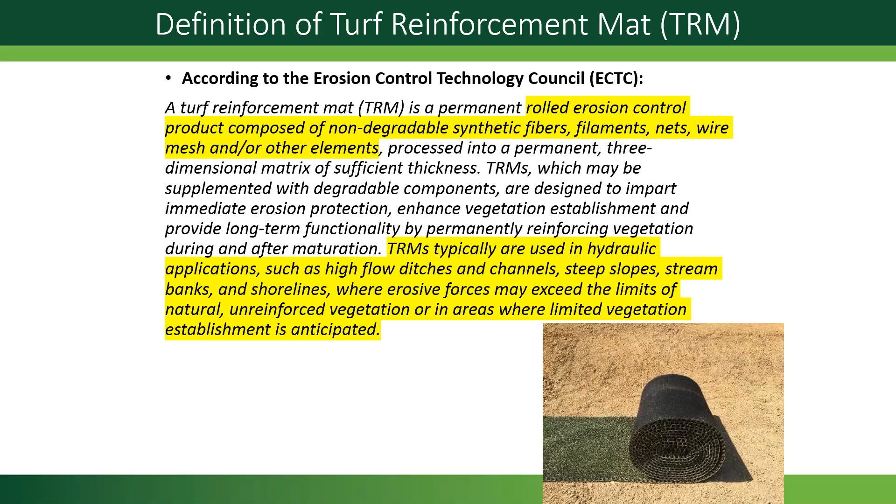Before we get into the products, I want to give you a little background on turf reinforcement mats, or as they're known in our industry, TRMs. The Erosion Control Technology Council has a published definition for TRMs: these are rolled erosion control products made from primarily non-degradable fibers or filaments. These products are typically used in high flow applications, very steep and high flow channels, steep slopes, stream banks, shorelines—basically in applications where the long-term erosive forces exceed the limits of natural unreinforced vegetation.

Now, the difference between a TRM and an erosion control blanket: an erosion control blanket is made from degradable materials. These products are used on a temporary basis to primarily control erosion and provide a mulching layer for vegetation establishment, but once the vegetation establishes, these products are expected to degrade. Erosion control blankets are typically manufactured from degradable natural fibers such as straw, coconut fiber, wood excelsior, and those materials are usually stitched into or between a photodegradable or natural fiber netting.

Permanent turf reinforcement mats, on the other hand, are made from non-degradable materials. These products are typically used not only to provide the initial erosion protection to get vegetation established, but they are meant to basically stick around long-term to reinforce the vegetation and increase the vegetation's erosion resistance.

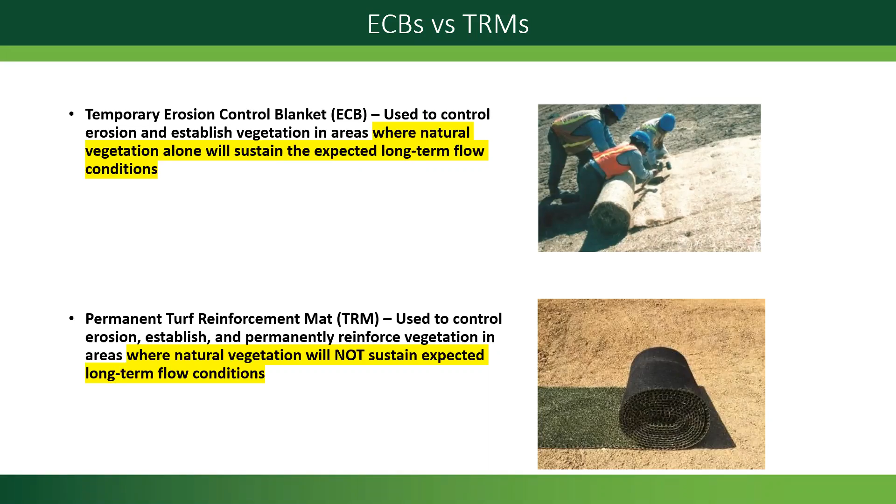TRM reinforced vegetation—these numbers are based on manufacturers' published values for the various products out there—typically range anywhere from 10 pounds per square foot up to 16 pounds per square foot. And that's vegetation reinforced with the turf reinforcement mat, that's mature vegetation.

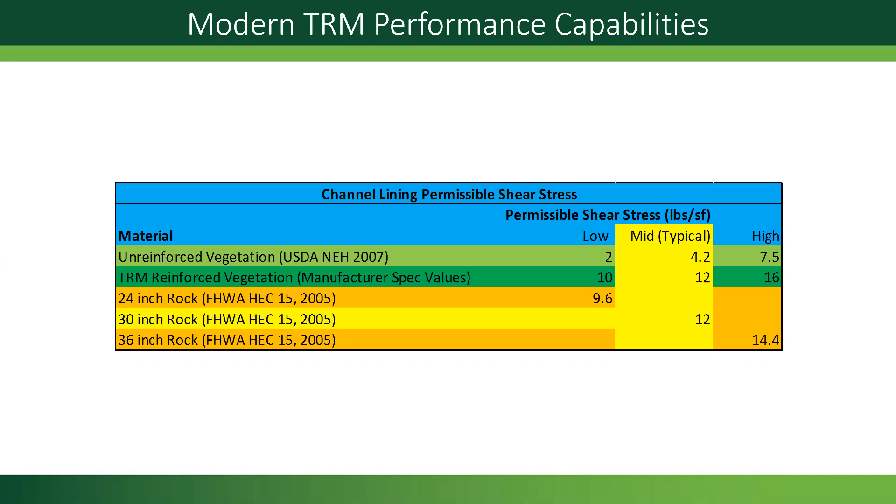If we look at some of the benefits that TRMs provide versus using hard armor such as rock: one, TRMs basically allow you to use more vegetation on your construction sites. So it allows for a greener construction site and all the ecological and environmental benefits that vegetation brings versus using a hard armor material.

Another benefit of using TRMs is they're typically less expensive than using, say, rock riprap. Typical install cost for a TRM is going to be less than 50% of that of rock riprap.

With these products, you don't need heavy trucks to transport the materials to the job site, and you don't need the heavy equipment—the backhoes and excavators—that are commonly used with installing rock riprap or concrete-based materials. TRMs, once they vegetate, can simply be mowed over, so they're fairly easy to maintain on a long-term basis. And from a hazard standpoint, using vegetation along roadways and pedestrian areas is a lot safer than using a hard armor layer such as rock riprap.

And then from the environmental side of things, with vegetation you get increased stormwater filtration as well as infiltration into the soil. And the vegetation itself can basically act as natural habitat on the job site and provide ecological function.

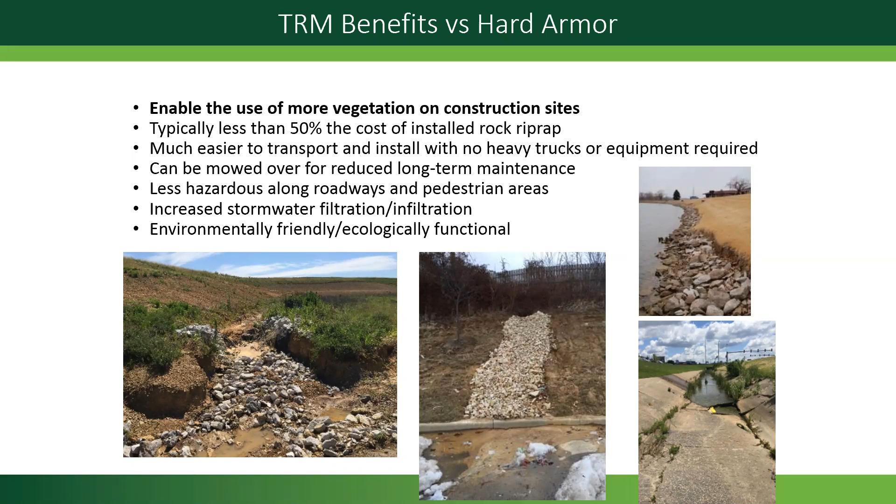So I want to give you a history of turf reinforcement mats. This technology has been around for almost 50 years now. The first TRM was developed in the early 1970s.

Now, with the openness of that structure, the product itself didn't really provide a lot of initial erosion protection before the vegetation became established. So these types of products, when installed, are often installed with a supplemental covering, like a degradable erosion control blanket, to provide the immediate erosion protection necessary.

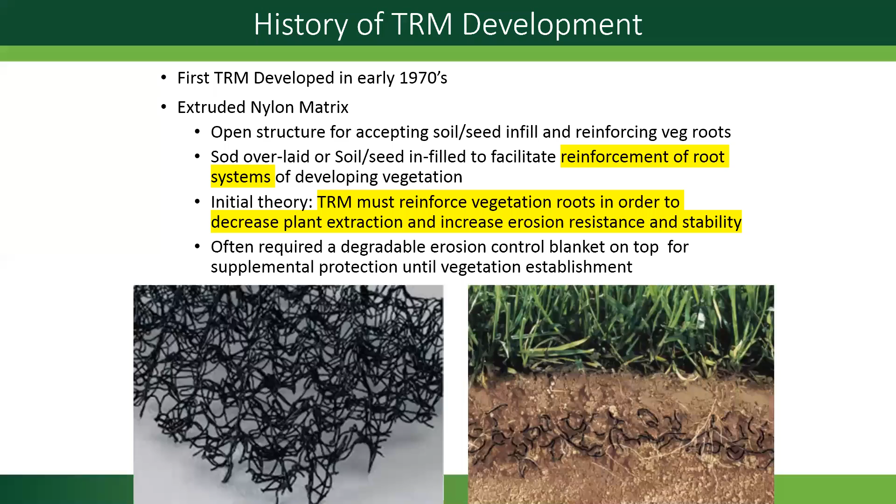So the types of applications these products are used in: steep slopes, levees, shorelines, channel lining applications, anywhere where they can go in and install the product and then apply the soil and seed into the product.

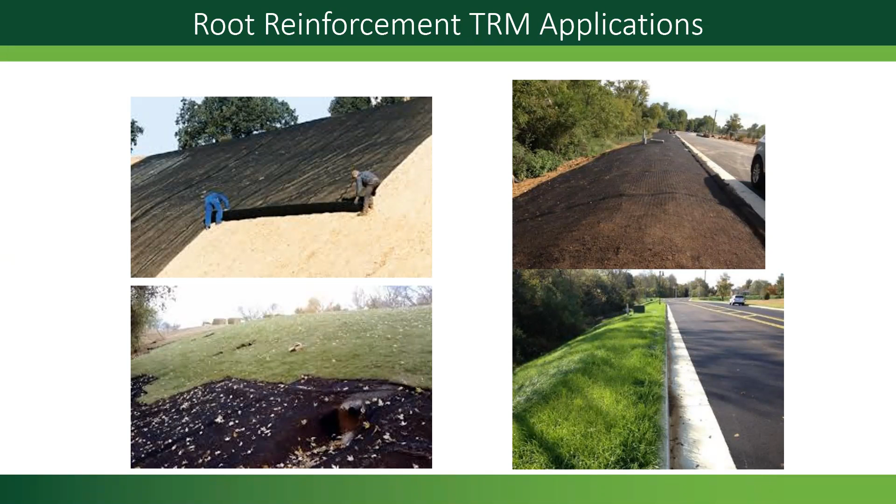Now in the mid-1980s, the surface applied TRMs came along, and these products were primarily developed by erosion control blanket manufacturers. So you had these ECB manufacturers out there at the time that were basically taking nettings and stitching straw or coconut or Excelsior in between those nettings.

And they thought, well, we can just basically substitute a non-degradable fiber between those nettings versus the degradable fibers and have a permanent erosion control mat. Those fibers typically consist of polyester or polypropylene.

And with the application of this type of product, instead of soil filling the mat, the TRM, these products were applied directly over the seed and soil, and then the vegetation would grow up through the mat.

So with this type of product and installation, the product itself, the TRM, is not really providing root reinforcement, but the term stem reinforcement was initiated at the time to describe the reinforcement the product's providing for vegetation. And it's not just a matter of reinforcing the stems of the vegetation, but these types of products also protect the soil in which the vegetation is anchored.

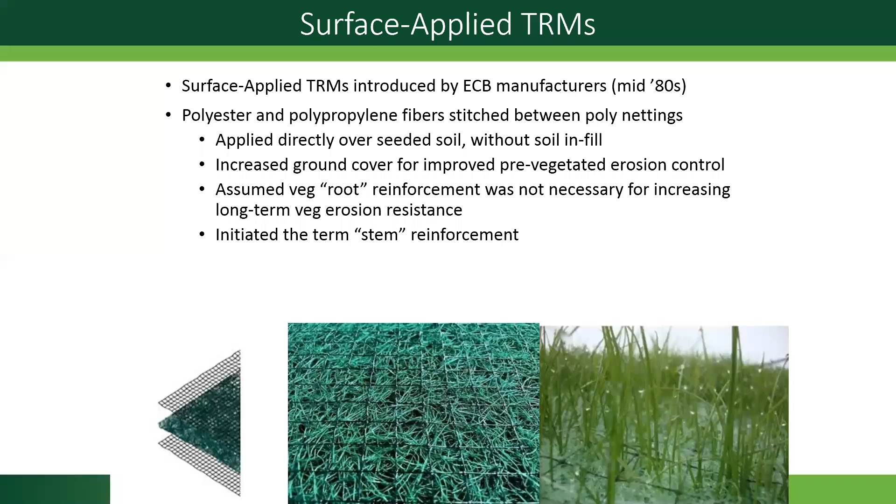Surface applied TRM applications are pretty much the same as what you have with the soil and seed infilled TRMs: channel lining applications, shorelines, steep slopes, and such.

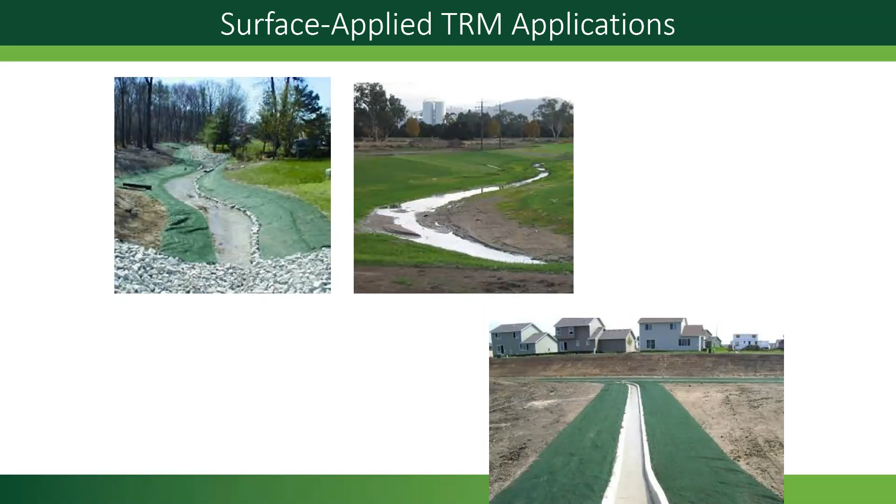And then in the early 1990s, one manufacturer developed the first composite TRMs. These composite TRMs were kind of a combination of a degradable erosion control blanket and a permanent TRM. The first product that came to market was manufactured with coconut fiber that was incorporated into a triple net structure, a three-dimensional netting structure.

So the coconut fiber was there to provide the initial erosion protection and mulching action. The three-dimensional netting structure would stick around long-term to provide the reinforcement layer for the vegetation itself. The reason for this was the natural fibers within this product would provide more mulching or better mulching action than the synthetic fibers in the previous surface applied TRMs.

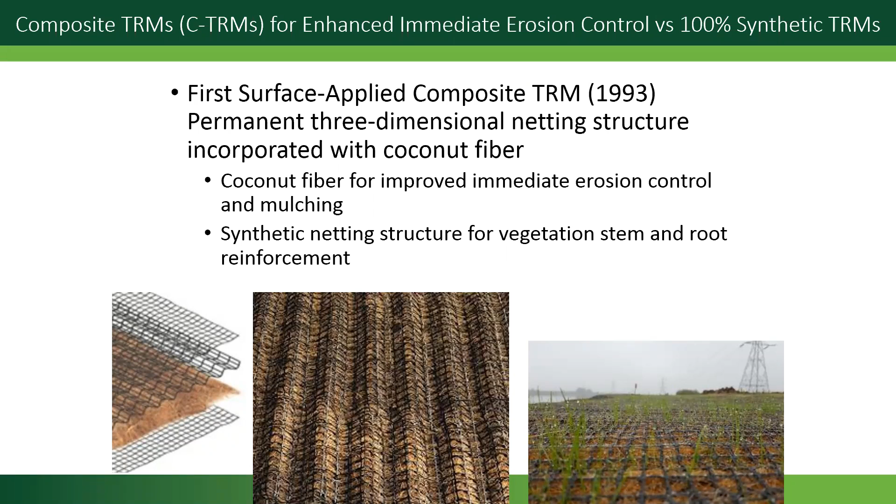And those coconut fibers also seem to provide a little higher level of erosion protection as well, at least on a short-term basis. The applications for this product are very much the same as the other TRMs I've discussed, with channel lining applications being the primary application you'll see.

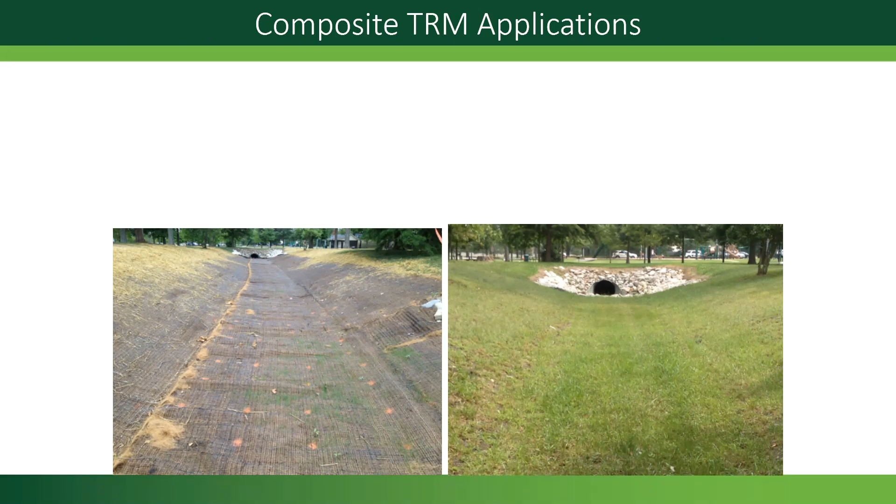And then in the mid 90s, the woven high performance TRM products were introduced to the market. These are very high strength materials. In fact, in order to be categorized or classified as an HPTRM by industry standards, the product has to have a minimum tensile strength of 3,000 pounds per foot.

Now, with that, I'd like to note that high tensile strength does not necessarily equate to increased erosion protection. The tensile strength is there for damage resistance. These types of products are often used where they're going to put the mat down and expect to run heavy equipment, heavy mowing equipment over the area in times where the soil may be saturated.

These types of products are also used in applications where they want to reinforce the veneer or the top layer of soil and prevent shallow veneer failures of the soil itself. In that type of application, these high performance or high tensile strength TRMs are often installed with an earth anchor system.

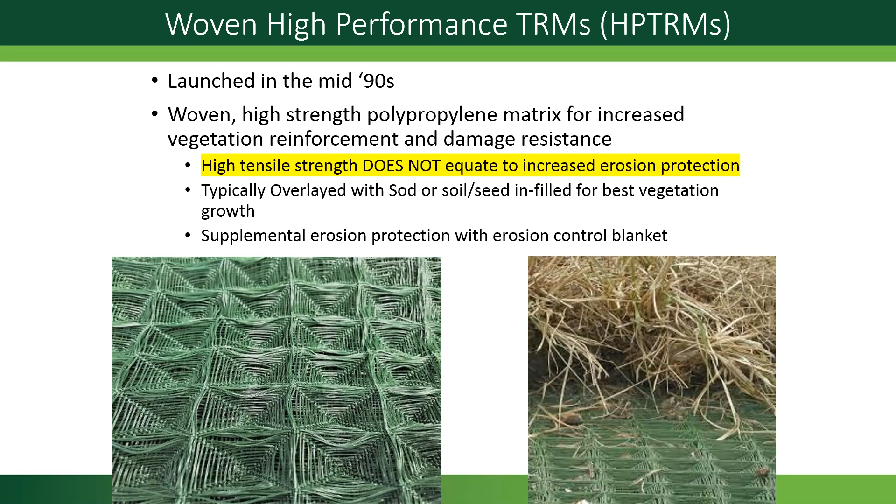Applications for these products: one application we've seen over the last several years is for levee protection. A lot of the high performance TRM type products have been used in protecting the levees that have been renovated down in the New Orleans area.

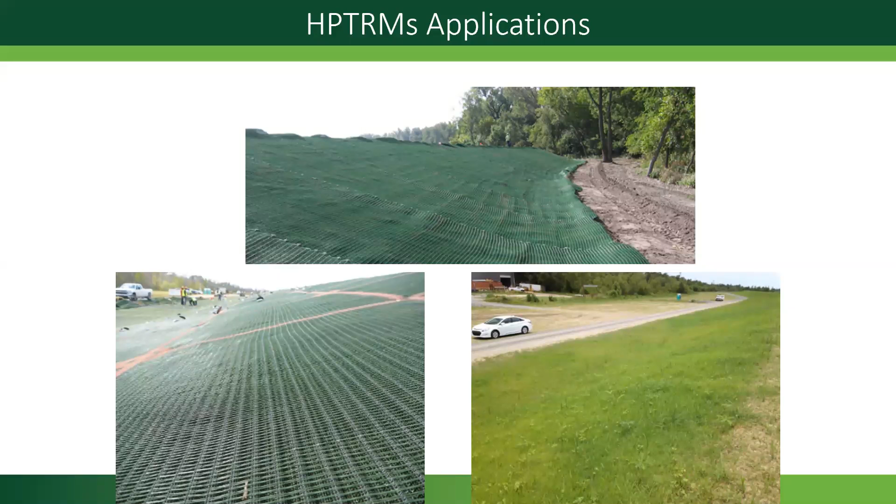And in that type of application, the material is installed with earth anchors, and then they actually apply a layer of soil over the top of the HPTRM, and then a layer of sod over the soil itself.

So those are the different types of TRMs that have been out there for quite some time. And I'm going to cover the advantages and benefits of TRMs versus using hard armor.

But there is one disadvantage that conventional TRMs have, and that is these types of products have fairly low erosion resistance until vegetation becomes established within the mat itself. These types of products, unvegetated, before vegetation establishment, typically have permissible shear stress ratings ranging anywhere from 2 to 4 pounds per square foot.

Full vegetation establishment with mature root systems can take anywhere from 6 to 12 months or sometimes even longer in certain areas. So there's that period of risk between the product's installation when it's unvegetated up until the time it becomes fully vegetated, where it may not provide sufficient erosion protection.

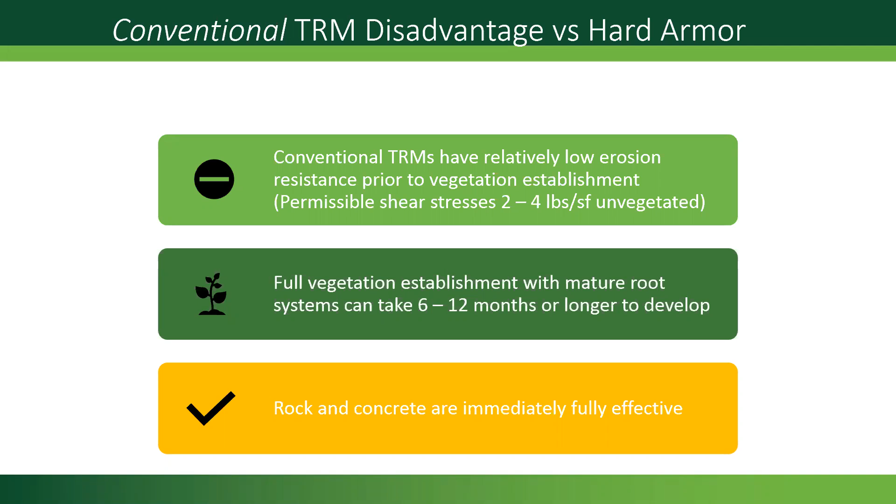Now, rock and concrete, when they're installed, they're immediately at their maximum erosion resistance. So in 2017, when I left my former employer, I started thinking about ways to improve that immediate erosion resistance of TRMs, because that was an issue we often faced with many engineers that wanted to use soft armor. They wanted to use TRMs instead of hard armor, but they didn't want to take the risk.

So with these products, as I said, unvegetated permissible shear stress ratings are 2 to 4 pounds per square foot. Once they vegetate, that number jumps up to 12 pounds per square foot and sometimes even higher. But it's that period of risk that has caused many engineers to shy away from using TRM systems.

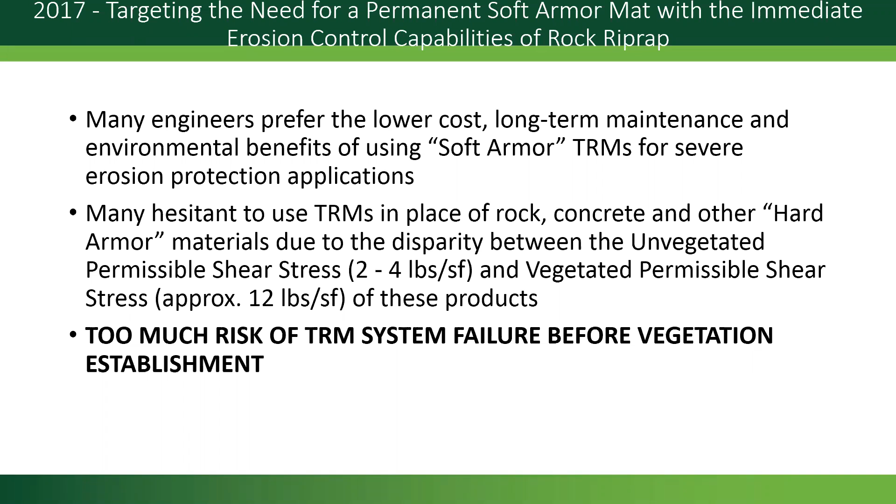Something else that is exacerbating this whole issue is climate change. It seems like these 100-year storm events are coming about every 2 weeks now, and you see it in the headlines all the time. I think we've all experienced the wacky weather over the last few years. With that higher frequency and larger storm events we seem to be having, that's basically increasing the chances of a major storm event or several major storm events occurring before these types of products become fully vegetated.

So with that, in 2019, we introduced to the market a new category of products that we call instant armor mats, and more specifically, a hybrid turf instant armor mat. These are soft armor products. They are meant primarily to replace rock riprap in your high flow applications. And these products are the first permanent soft armor mats that actually provide the same level of immediate erosion protection as very large rock riprap.

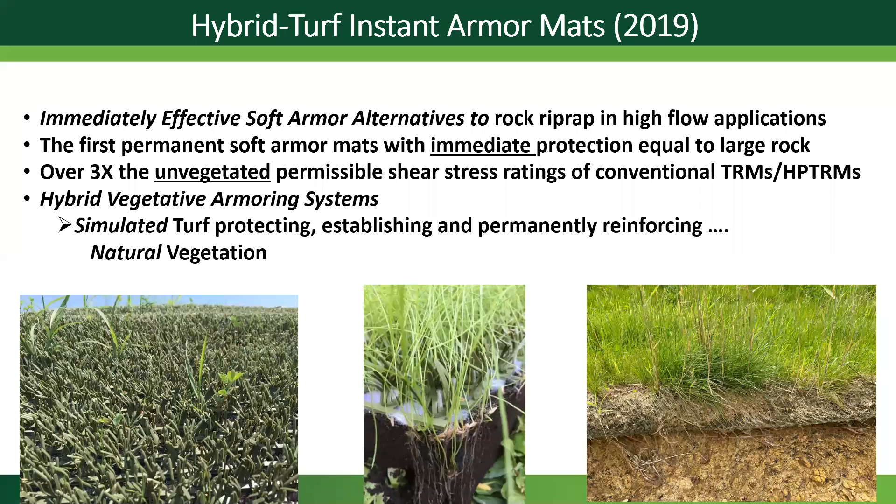They have between 3 and 4 times the unvegetated permissible shear stress ratings of your conventional TRMs, as well as HP TRMs. And I think of these products, in the way they perform, as hybrid vegetative armoring systems. So it's basically simulated turf that protects, establishes, and permanently reinforces natural vegetation.

So there are 2 products that we consider instant armor mats. One, the product to the left, comes in roll form, and this construction, being supplied in roll form, makes it very similar to your conventional turf reinforcement mats. With this particular product, you're going to seed first and apply the mat over the top of the seed and allow the vegetation to grow up through the simulated turf. Then the product you see to the right is the instant armor scour mat, and that actually comes in panel form.

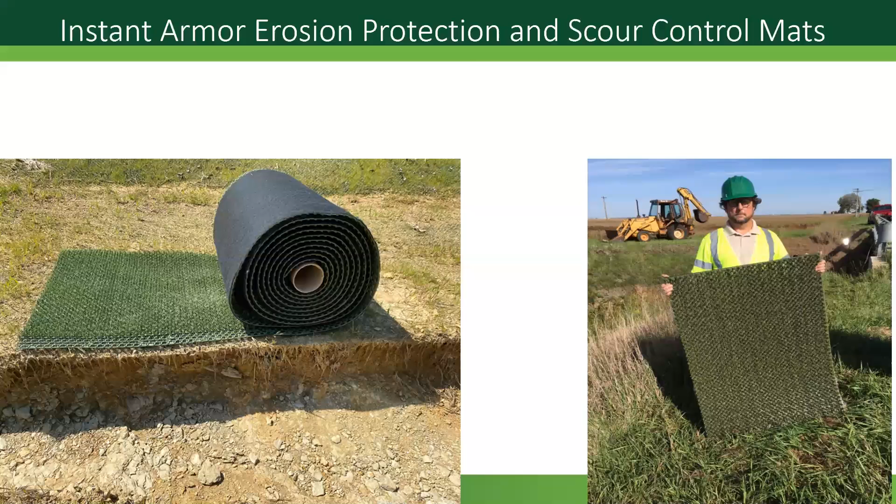So the hybrid turf instant armor mat, to give you an idea of how this product is made, it's basically a 1-inch thick monolithic UV stabilized polyethylene structure. And what I mean by monolithic is it's all molded into one piece - it's not stitched or glued together. Then on the back side, or the bottom of the simulated turf, is a very lightweight polyester geotextile. That geotextile was specifically designed to not only trap the fine soil particles beneath the mat, but the material is light and open enough to allow for vegetation emergence and development up through it.

This product comes in roll form, and those rolls are either 3 foot wide or 6 foot wide by 45 feet long. The 3 foot wide rolls weigh approximately 50 pounds, and the 6 foot wide rolls weigh around 100 pounds.

Now, this product's going to be installed very similarly to the surface applied TRMs. So you're going to seed first and then install the mat over the top of the seed. Installation is typically done with an 8-inch wire staple; sometimes fabric pins or rebar stakes are used depending on the soil condition you're anchoring into. Then once the product vegetates, it's easy to maintain - you can simply mow right over the top of it.

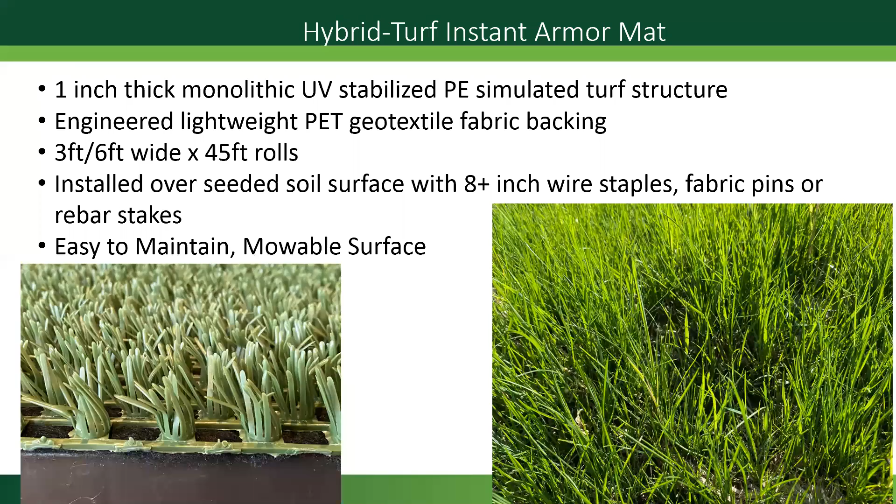So the way this product works, there's basically 3 mechanisms at play here. One is the simulated turf itself. That simulated turf basically forms a shear plane on top of the fabric and underlying soil. And what that does is deflect or lift a lot of that shear force that would normally be acting upon the soil, raising that plane above the soil, so there's less erosive force reaching the underlying soil surface.

Then the fabric backing does 2 things. One, it basically filters fine soil particles and traps those particles beneath it, keeping them from being sucked or pulled out of the mat under flow conditions. And then the fibers within that fabric, particularly when applied to a clay-based soil, when they get wet, they stick to the soil and adhere to the soil particles. That picture on the right shows how those fibers are stuck to the soil as we're trying to pull the edge up on the mat. So that helps trap and lock the soil particles into place.

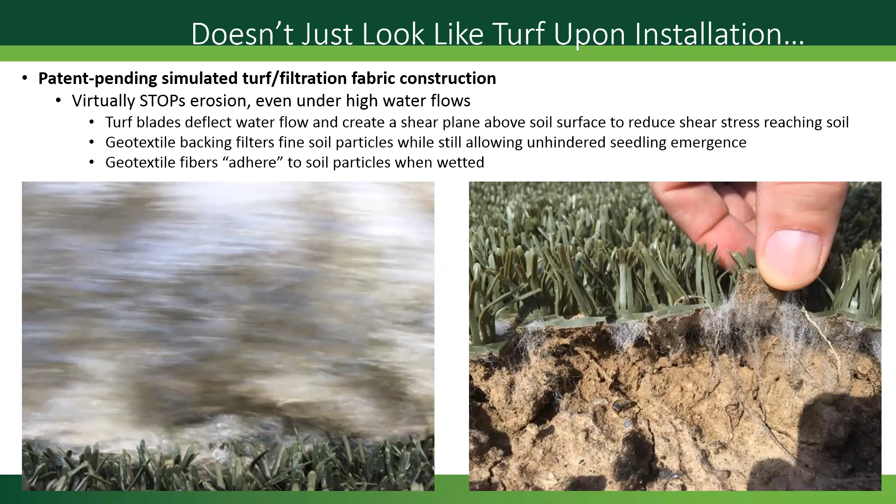Testing on this product was done under the ASTM D6460 large-scale channel testing protocol, in an unvegetated state, at TRI Environmental down in South Carolina. They do all of the AASHTO NTPEP testing on rolled erosion control products enrolled in the AASHTO NTPEP program. Their test protocol uses 2 foot wide by 40 foot long channel flumes, with a loam soil type, and typically TRMs are tested on a 10% channel gradient.

We actually went to a 20% channel gradient with this product because we started at a 10% gradient and had very, very little measurable soil loss. So we increased to a steeper channel gradient in order to get higher velocities and higher shear stresses to try to reach a failure point for the product. The mats in this test were installed with an 8-inch wire staple at 3.8 staples per square yard. In the testing protocol, they use 3 separate channel test flumes, and within each test flume they do 4 consecutive 30-minute flow events.

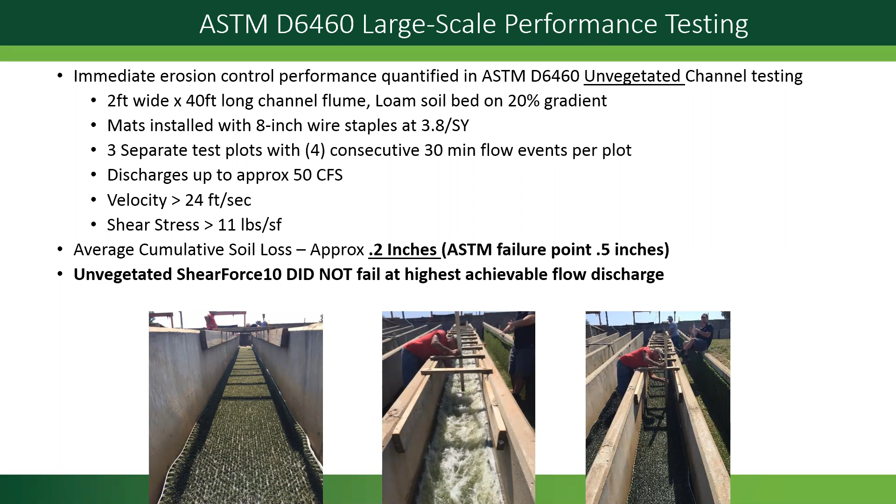Our discharges ranged anywhere from around 10 CFS up to 50 cubic feet per second, reaching velocities over 24 feet per second and shear stresses between 11 and 12 pounds per square foot. Through all of these tests, the cumulative soil loss from our test plots averaged 0.2 inches. In the ASTM protocol, the failure point is set at 0.5 inches, so the product never reached failure. The reason we couldn't reach failure is they didn't have enough flow discharge on site to get any higher velocities and shear stresses to get the product to a failure point. So the product never reached failure in the test, although we tried.

If you look at the performance of the product through the ASTM D6460 testing compared to other materials out there, this graph shows cumulative soil loss on the y-axis in inches, and shear stress or applied shear stress on the x-axis. You see three graph lines to the left, your conventional HP TRMs. The light blue line is a woven polypropylene HP TRM, the orange line is a double net polyfiber turf reinforcement mat, and the light purple line is a triple net coconut fiber composite TRM. One thing you'll notice is the performance of all three is pretty similar, grouped fairly close together, and all three are at or approaching the half-inch failure point anywhere between 2 and 3 pounds per square foot of applied shear stress.

If you move to the right, you'll see the yellow line, which is a tied concrete block mat, and the green line is the Hybrid Turf Instant Armor mat. You'll notice that the Hybrid Turf Instant Armor mat runs neck to neck with the tied concrete block mat in terms of controlling soil loss under some fairly high shear stresses, up to between 11 and 12 pounds per square foot.

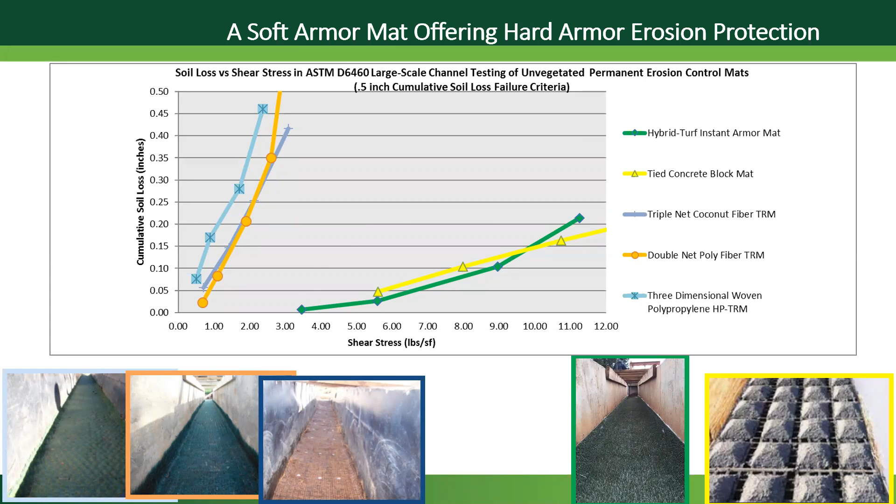So we say this product gives you the performance of reinforced turf from day one, and this graph shows that. The top three lines are the conventional TRMs I showed you previously, but here they are fully vegetated, with approximately 12 months of vegetation growth. The green line is the Hybrid Turf Instant Armor mat, still with no vegetation. You can see that the Instant Armor mat, even without vegetation, provided maybe a little bit better control of soil loss than these other products did with full vegetation establishment.

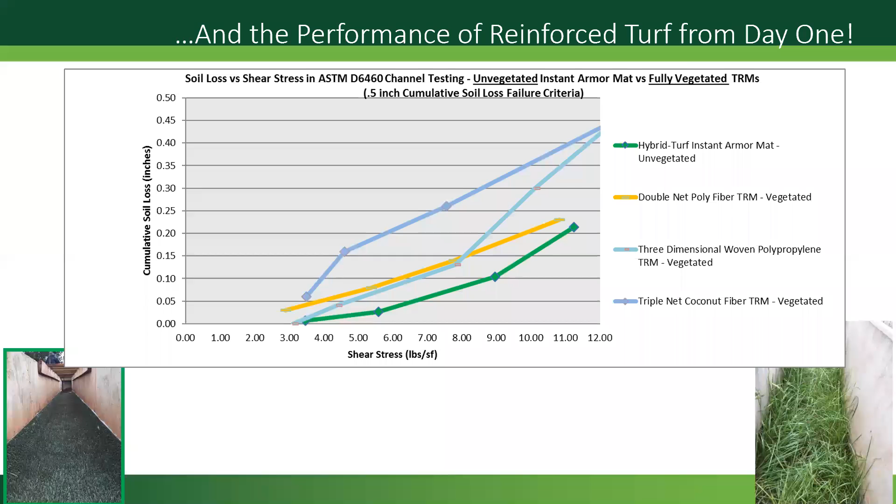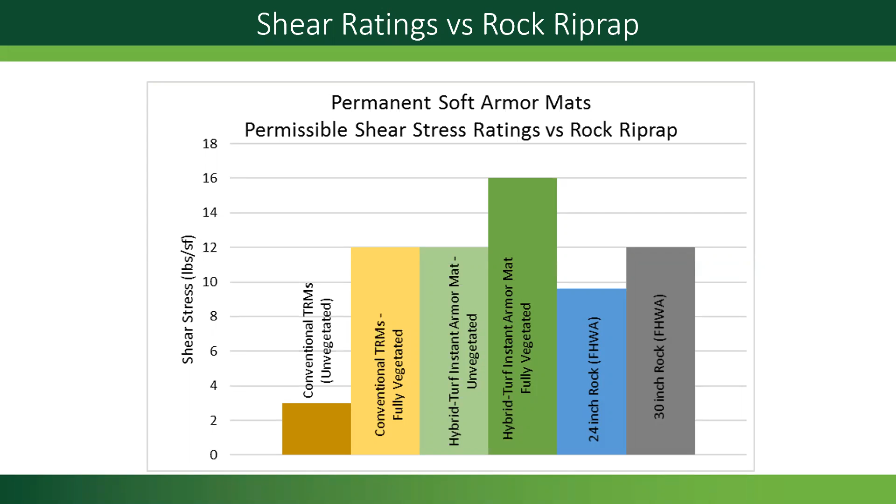If we look at the shear stress ratings of these various products versus rock riprap, conventional TRMs, as you see to the left, typically range between 2 and 4 pounds per square foot without vegetation, averaging around 3 pounds per square foot. Once those materials become vegetated, that number jumps up to 12 pounds and sometimes even higher. The Hybrid Turf Instant Armor mat, unvegetated, actually starts out at 12 pounds per square foot permissible shear rating, and once vegetated, we're projecting a permissible shear of 16 pounds per square foot. Compare that with 24-inch and 30-inch rock, and you can see how these materials can actually be considered viable replacements for rock riprap.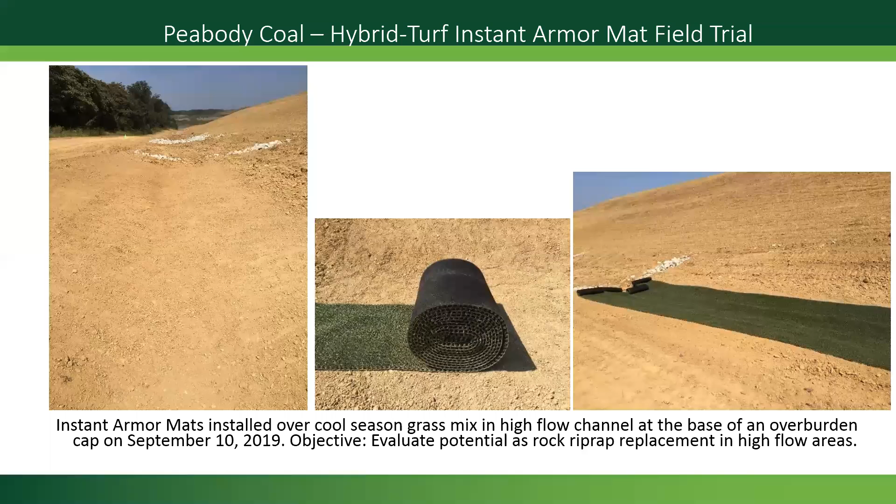So when we did the test installation, you can see basically a rock riprap check dam downstream from the test section as well as upstream from the test section. And then between the rock riprap check dams and the test section, we actually left that bare. Those areas were simply seeded and straw mulched, and we left those as control areas to see what would happen without the mat protection.

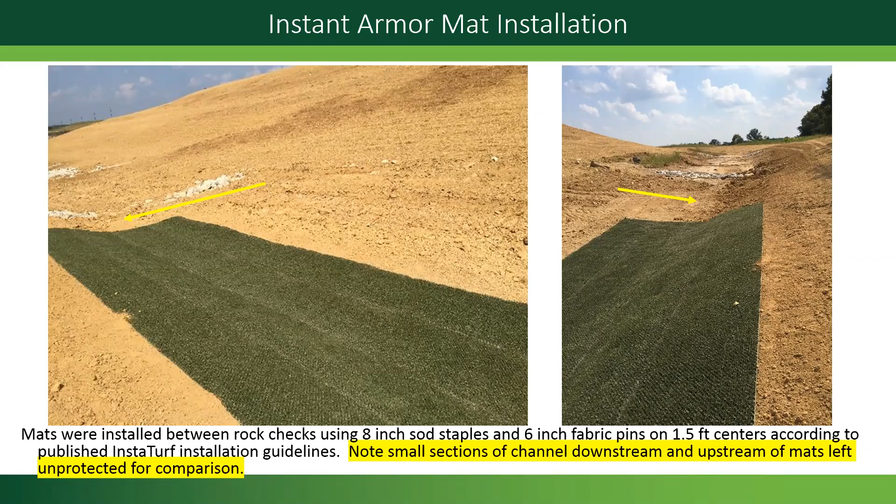This is a picture of the mat just after installation, looking downstream or downslope.

I went back out to the site about a month later, and at that time we had had hardly any rainfall, so I didn't really expect to see much, and I didn't. There was hardly any vegetation that had germinated and emerged up through the mat at that point, as well as in the surrounding areas that were just straw mulched. But as things often happen, two weeks after that picture was taken, where the mat was pretty much just bare and unvegetated, that's when the rainfall started.

On October 21st, we had a little over 1.5 inches of rainfall. Then a week after that, we had over 2 inches of rainfall in a 24-hour period. And by the end of October, we had had a total of 6.5 inches.

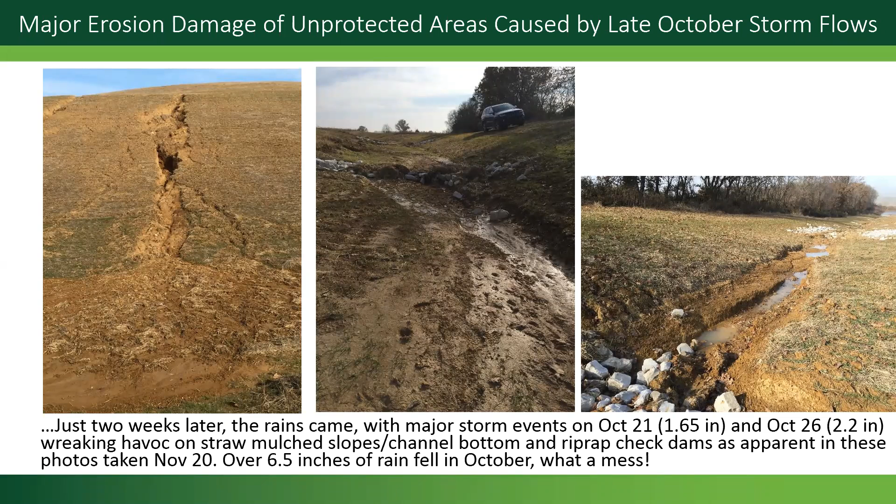The picture to the right shows you one of the gullies that had started to form at this point as well. That gully is probably about 3 feet wide at that point, maybe a foot or so deep.

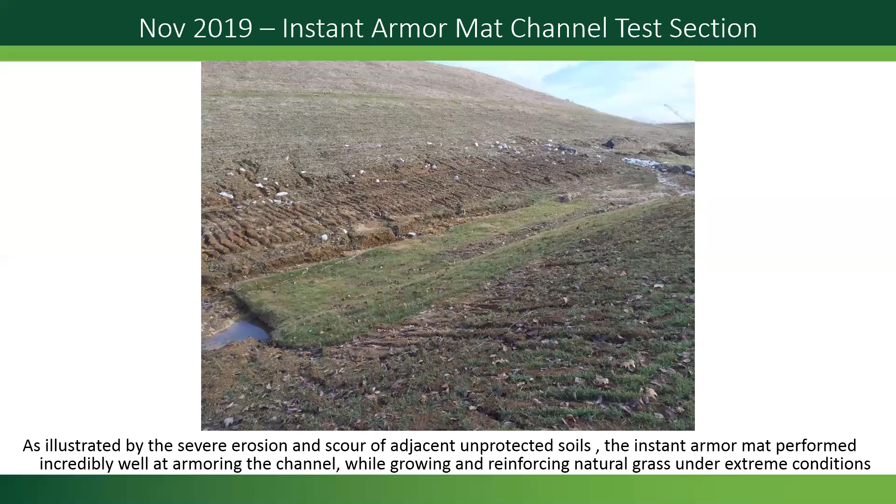I got to our test section. I was a little concerned after seeing all the damage that had occurred in other areas. And I saw this: it was like a green rectangle of vegetation surrounded by a lot of eroded soil. So I was very pleasantly surprised and pleased to see the test section held up as well as it did.

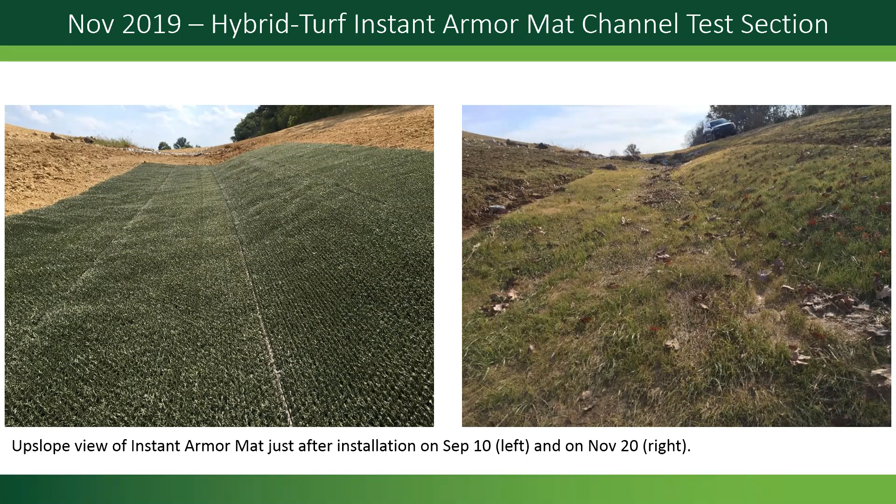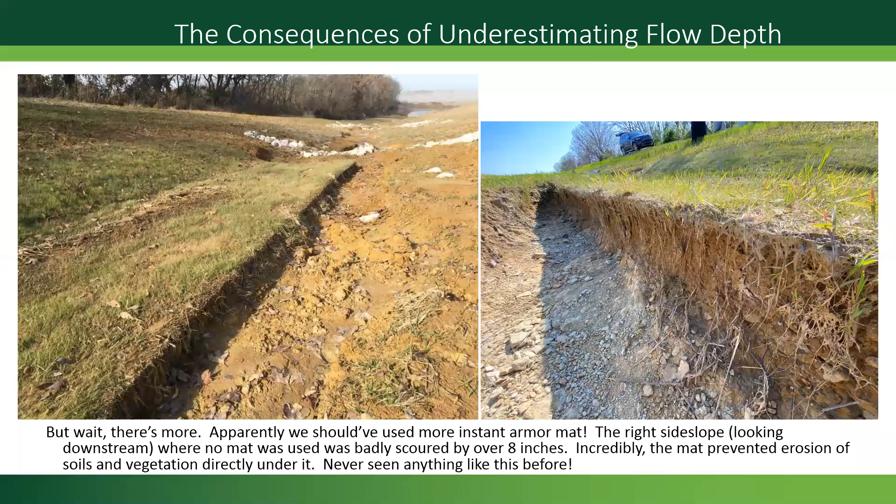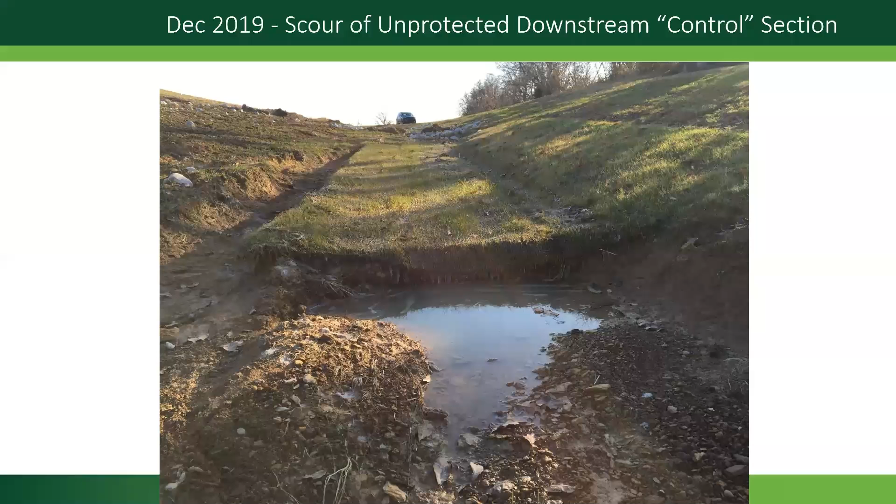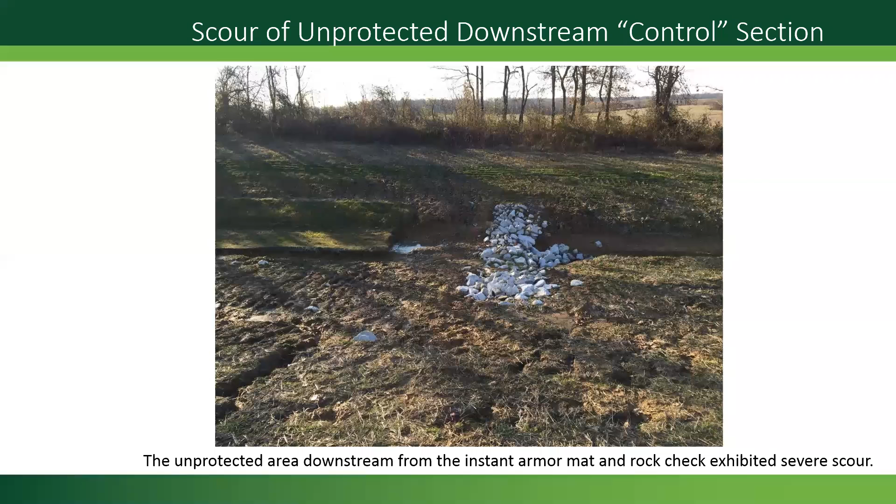I went back out to the job site in May to see how things were doing.

The test section itself had vegetation fill in very well and green up nicely. At the end of April, they had come in and infilled that gully that I showed you, which ran along the left side slope. They had infilled that gully, straw mulched it, and seeded over it.

By the end of May, on May 28th, all that infill soil had washed out again. We had quite a bit of rainfall in mid-May, and all that infill soil washed out. There were actually some rocks that had washed in or deposited in that gully along the edge of the mat, washed out of the riprap check dam upstream and found their way down into that gully next to the mat. If you look at the picture to the right, you can also see that check dam is pretty much leveled at this point in time.

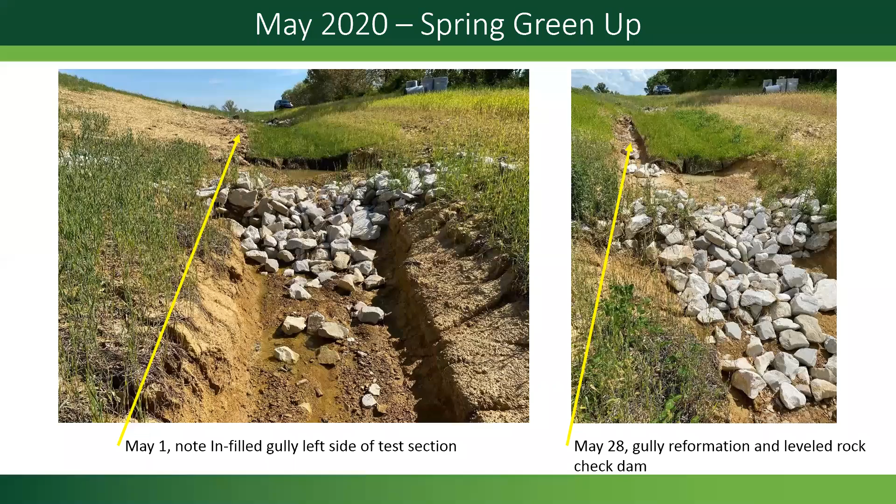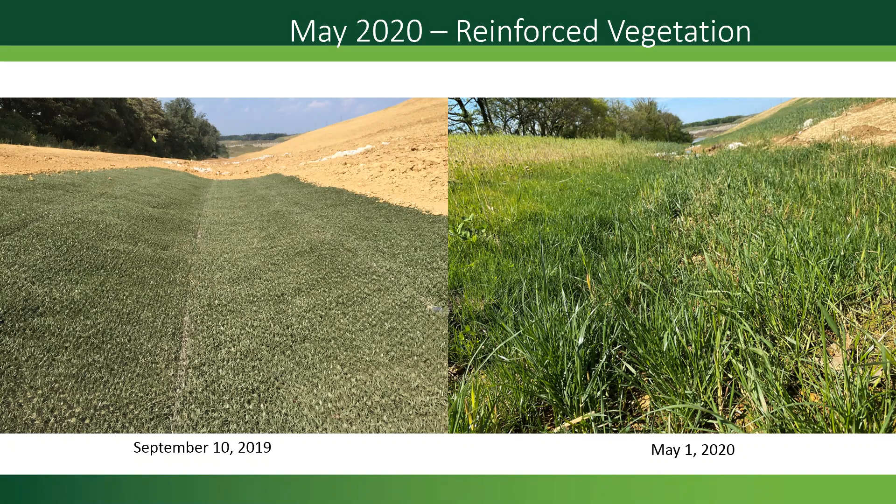Picture to the left was taken upon installation, picture to the right on May 1st, and you can see how well the mat is vegetated at this point. The good thing is that vegetation is now reinforced. With the mat being down there at the base of the vegetation, that mat is increasing the erosion resistance of the vegetation itself.

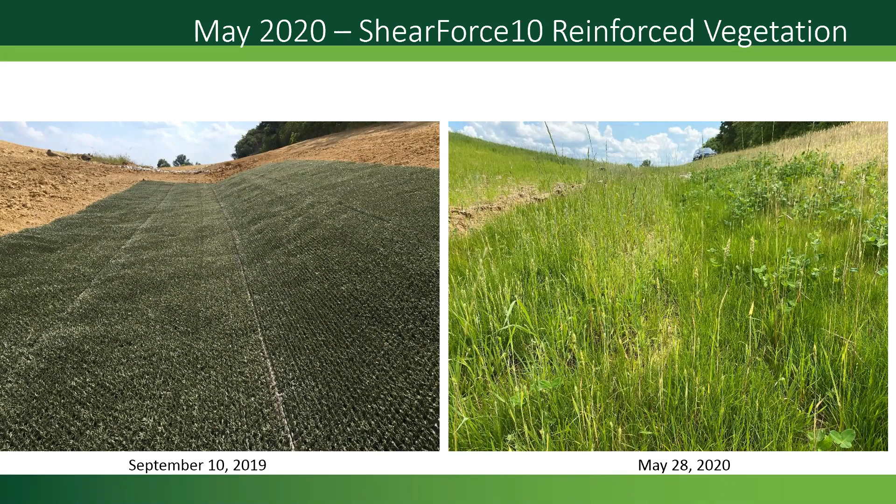Just another look at it. This is looking upstream, and the picture to the right was taken at the end of May. Once again, you can see how well the vegetation has grown and established in the test section.

Another application for the product, this was also done with Peabody Coal, for stream bank protection. They've got a lot of streams they've had to construct - basically any streams and drainage areas they disturb during mining activities, they have to replace elsewhere. They construct these streams, overseen by the Army Corps of Engineers. The Army Corps wouldn't allow them to use anything on the bottom of the stream - it had to remain open, bare soil, primarily for the benthic organisms to live in there.

But they wanted to protect the stream banks through the winter months. This was going in late October, so they knew they weren't going to get good vegetation establishment till the following spring. So they wanted some pretty good protection for those banks through the winter months.

This was in 2018, and the winter between 2018 and 2019 was very wet in this area. I think we had over 6 storm events with 2 inches or more rainfall in a 24-hour period. Every time it rained heavily, this stream valley would just fill up - it would just submerge the entire stream channel, as you see there in the center picture.

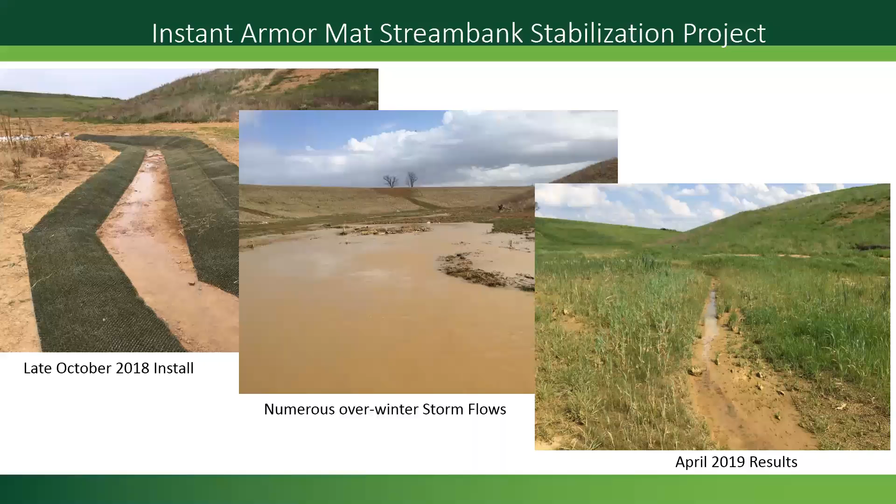By the end of April 2019, you can see how well the mat had vegetated. You got a lot of good growth there. Today that whole stream is just like a jungle out there - it's extremely well covered and vegetated, and the mat's still there, reinforcing that vegetation.

So just to wrap up, the HybridTurf Instant Armor Mat gives you 3 to 4 times the unvegetated permissible shear stress of your conventional TRMs and woven HP TRMs. This basically just means less worry on how quickly you can get vegetation establishment on your site. These products give you immediate rock-like erosion protection, typically at less than half the cost of riprap.

Sometimes it's much less than half. They're more attractive, cost less, and are easier to install than other hard armor type materials like tied concrete block mats and articulated concrete blocks. Being a simulated turf, they basically give your job site an immediate vegetated look, and if the vegetation ever dies back for some reason, the site still looks vegetated.

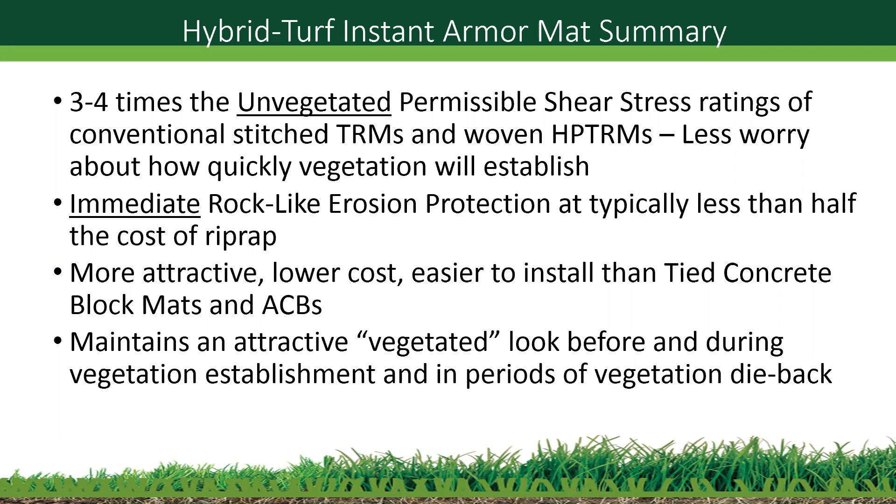So that puts us to the Instant Armor Scour Mat. The only difference between this product and the Instant Armor Mat, the turf reinforcement mat type product I just showed you, is this product incorporates a half-inch rubber core. That rubber core basically adds ballast and weight to the product for use in more turbulent flow situations. That rubber core has 1.5-inch holes in it to allow vegetation establishment up through. This product comes in a 3-foot by 4-foot panel, and those panels weigh about 30 pounds apiece, so they're fairly easy to handle.

This product is an all-in-one scour mat, meaning a lot of other scour mats require some form of secondary underlay, such as sod or a turf reinforcement mat. This product does not require a secondary underlay. So you're going to basically apply seed and then install the panel directly over the seed, and the vegetation grows up through the holes in the panel.

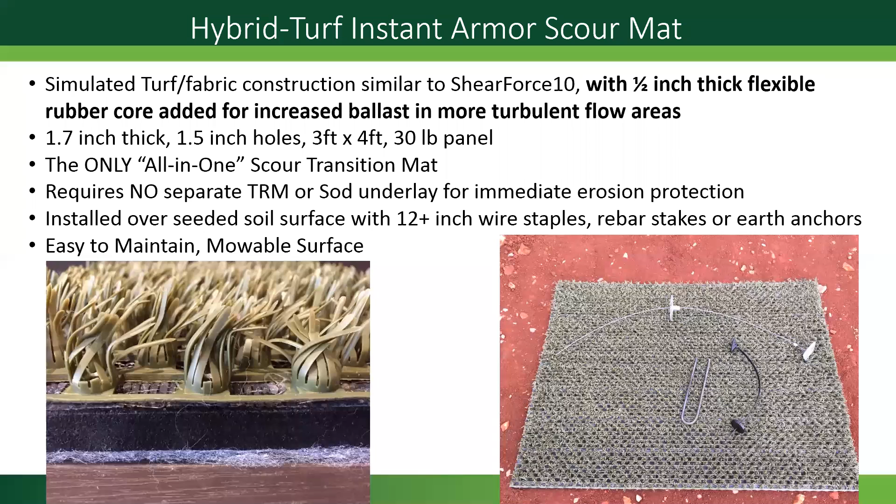Installation of the product is typically done with a 12-inch wire staple or rebar stakes, and in some cases earth anchors are used if you've got a very loose soil condition, sandy soil condition, or a muck type soil you're trying to anchor the panel onto. Once they become vegetated, you simply mow over these to maintain the vegetation.

These products have a very high unvegetated permissible shear stress rating, 14 pounds per square foot, which is basically the same as a 36-inch diameter rock riprap.

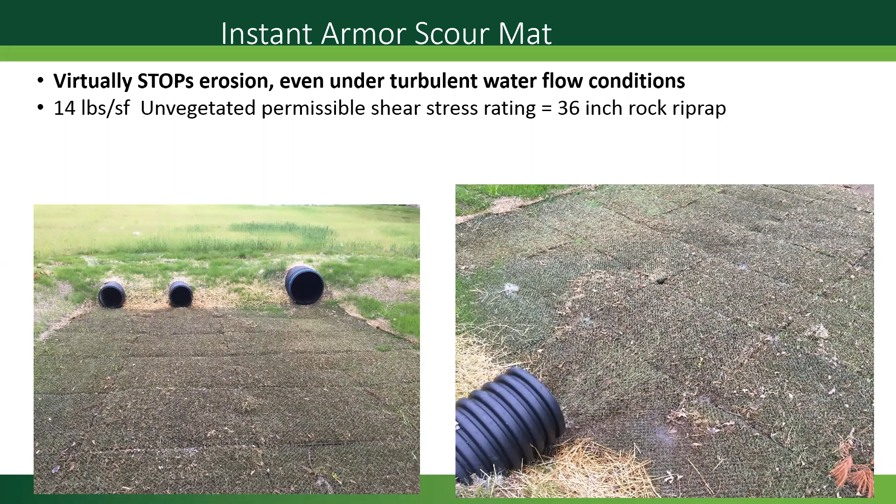If we look at the performance of this product as tested under the ASTM D6460 protocol versus some other typical scour mats out there, the purple line is a rubber scour transition mat with a polyfiber turf reinforcement mat underlay, a combined system. That type of product reached the half-inch failure point at around 8 pounds per square foot of shear stress. The yellow line is a tied concrete block mat, which we previously compared the Instant Armor mat to. The green line is the Hybrid Turf Instant Armor Scour mat. You can see the Instant Armor Scour mat actually provided a bit better soil loss control under fairly high shears than the tied concrete block mat did through the ASTM testing.

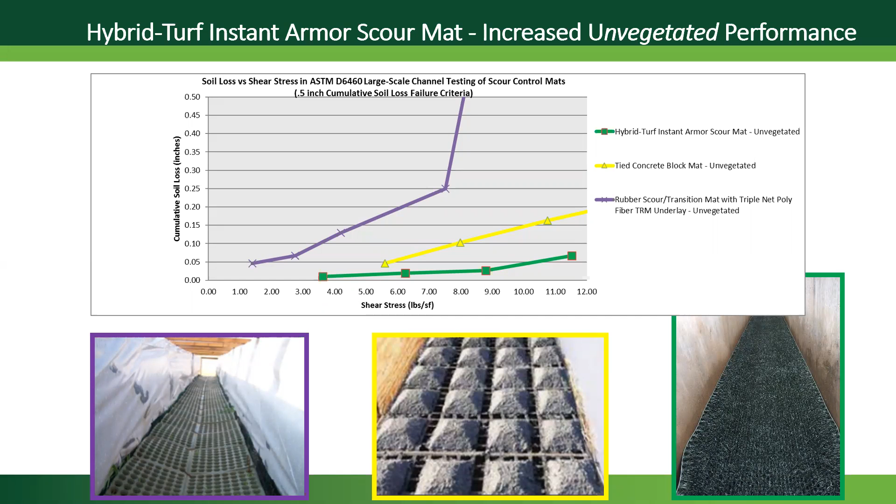Typical applications for this product include culvert and pipe outfalls, probably the number one most typical application. But we're also seeing other applications where there are very turbulent flow conditions, including shoreline applications, downshoots and outfall areas, and curb cuts on parking lots where there's a lot of grade change, a steep gradient in soils you're trying to protect with quite a bit of flow.

Another more recent application is downspouts, commercial and residential, where they're putting a mat down, and the mat basically absorbs the impact of the falling water and distributes it once it hits. These mats can be vegetated, and you can simply mow right over the top of them. They don't have to be moved like they often do with, say, a plastic tray or other downspout protection devices.

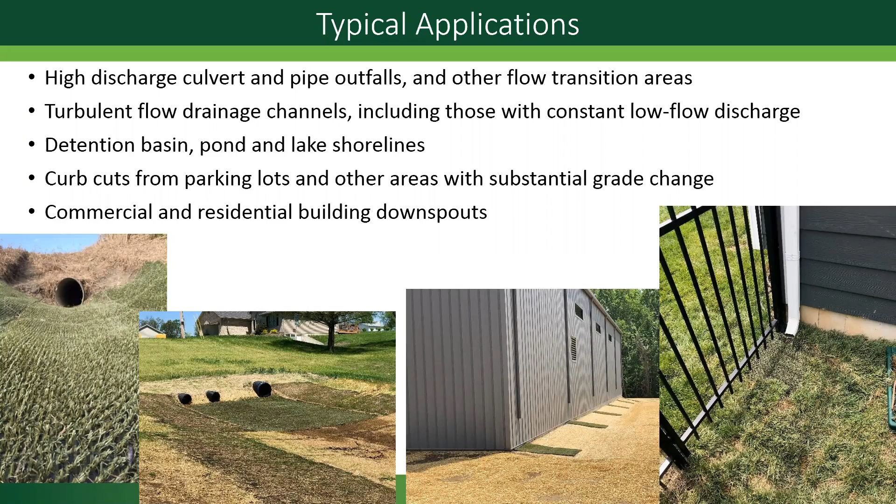So, culvert and pipe outfalls. This is a culvert outfall area done with the Instant Armor Scour mat. The picture to the left was taken upon installation in fall of 2017. The center picture was taken about 30 days after installation, and you can see new vegetation emerging up through the mat at that point. The picture to the right was taken the following spring, and by then the mat itself was pretty well covered in vegetation.

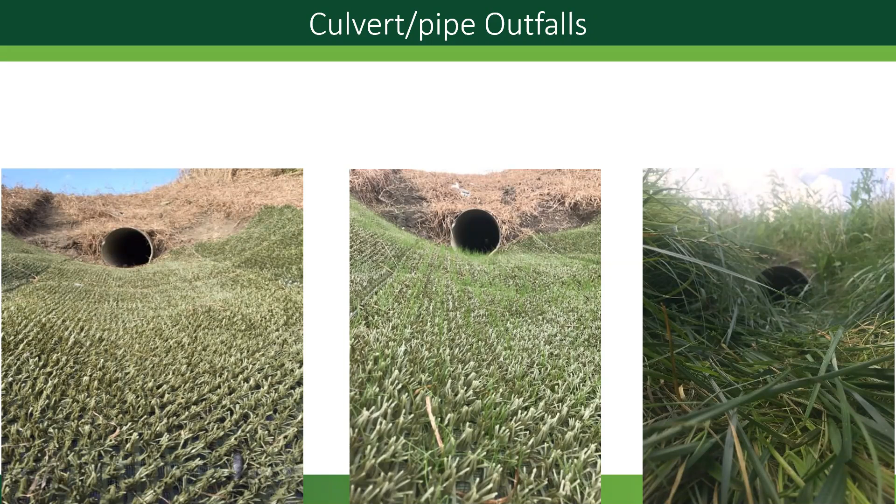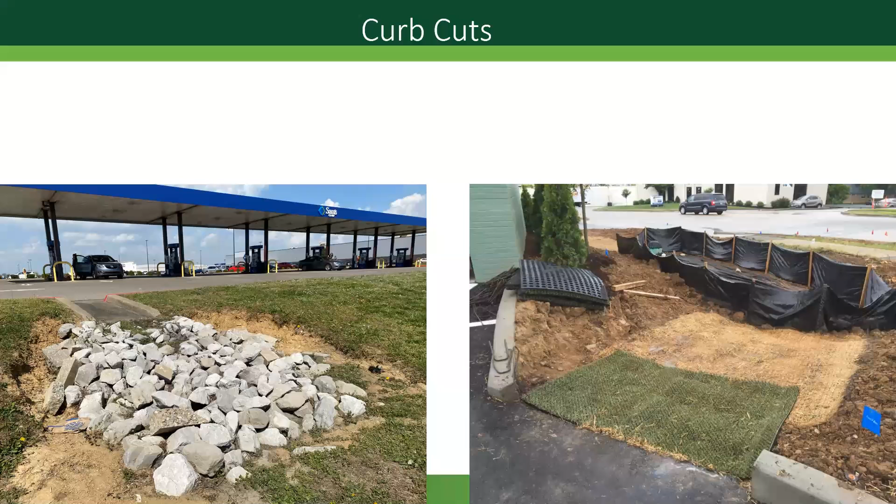Now, I mentioned curb cuts as a potential application. Typically you see this all over the place: at the end of these curb cuts, at the end of the concrete, they basically just dump a pile of rock. What often happens is water finds its way around that pile of rock and begins eroding the soil between the rock and the vegetation around it. So this pile of rock becomes not only an eyesore but a maintenance issue for the people maintaining the vegetation around it. These Instant Armor scour mats can be used in these curb cut areas instead - put the mat down, let it vegetate, and the person maintaining the area can simply mow right over the top of it, and it looks much nicer than a pile of rock riprap.

So just to summarize on the Instant Armor Scour Mat: this product requires no additional underlay, TRM, or sod, which saves time and money in installation. These products are very flexible, so they're easy to install and conform to the underlying soil, and a lot quicker to install than a tied concrete block mat. They don't require heavy equipment to transport or place the materials. They're very flat once installed, so vegetation grows up through it and you can simply mow right over the top without worrying about mower blades catching a rock or a bump of concrete. And once installed, these products look vegetated right away, providing some aesthetic benefit as well.